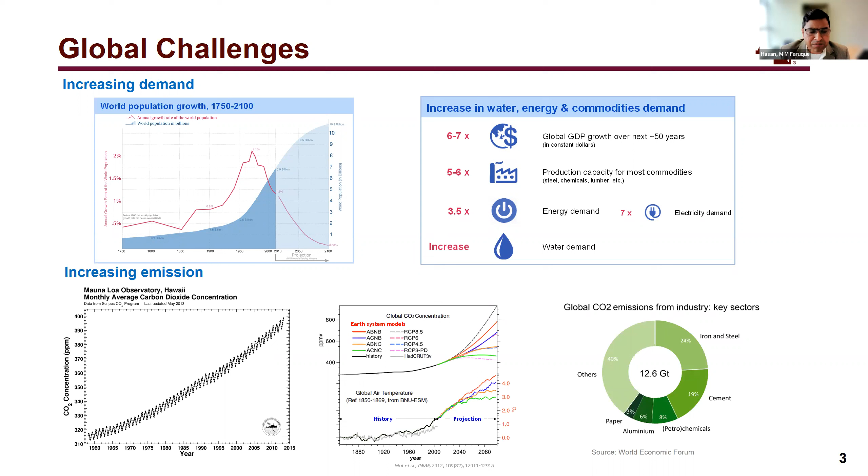Typically, over the last century or so, we have been depending on fossil fuels primarily to meet those demands for energy and associated chemicals. So now there is a challenge too, because when we use conventional fossil fuels like coal, natural gas, or oil, there is an issue of emission, and as we all know, the anthropogenic CO2 emission is a concern. There is now a consensus through scientific studies and research that there is a relation between the global CO2 concentration in the atmosphere and global warming. This is a concern, and a challenge which is global.

So to address this challenge, when we want to meet the demand for humankind, at the same time we want to meet the demand in a sustainable way, new challenges come in terms of how we develop new technologies, how can we make them more sustainable, and so on. How can we produce chemicals and plastics and polymers and many other chemicals in a more sustainable way.

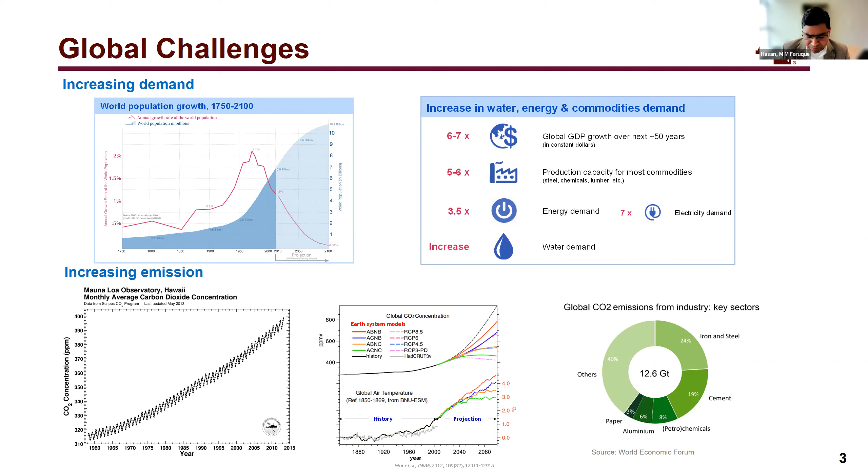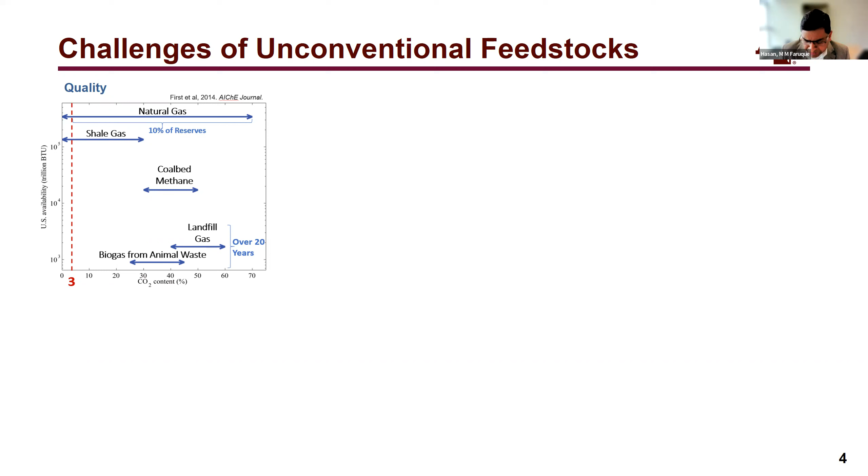So we have, as a global community, also looked into unconventional feedstocks. For example, cleaner natural gas, which is a cleaner fossil fuel. There is other revolution in terms of, for example, shale gas, particularly in the US in recent times. There are other resources which are more unconventional at a different scale. If we want to bring them for use in the energy and chemical sector, one of the challenges is that the separation cost for these unconventional feedstocks is significantly high. For example, many of these unconventional feedstocks have CO2 as impurity, and to remove CO2, the cost is high.

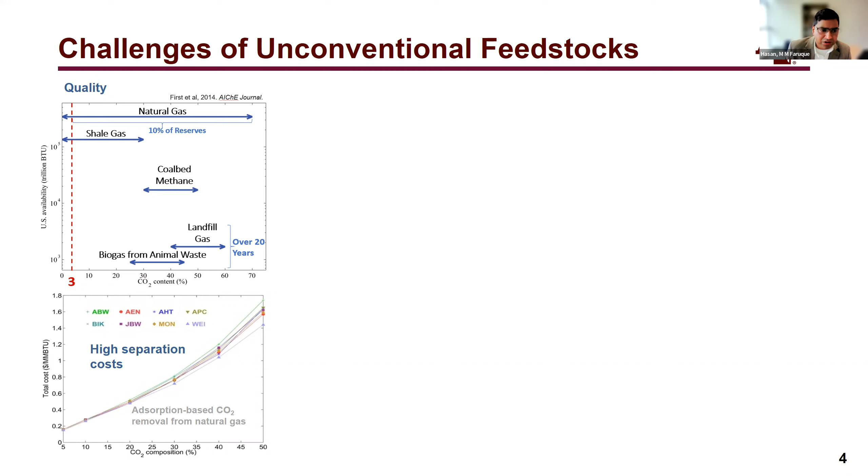That's a challenge. Typically, we do not use these kinds of unconventional feedstocks at a larger scale because of high cost and issues around them. What we typically do is consider them as associated gas and burn them, and as you can see, that creates a secondary environmental problem, which is we again produce more CO2 and put it in the atmosphere.

There is another challenge apart from the cost for these unconventional feedstocks, which is many of these are distributed over geographic locations. They are sparsely distributed and very small scale. Unlike centralized processing facilities, chemical and petrochemical complexes that use crude oil or energy resources in bulk, these energy resources are going to be at a small scale, and we need to decentralize our entire chemical enterprise. So that brings us to the next challenge of how we can do that.

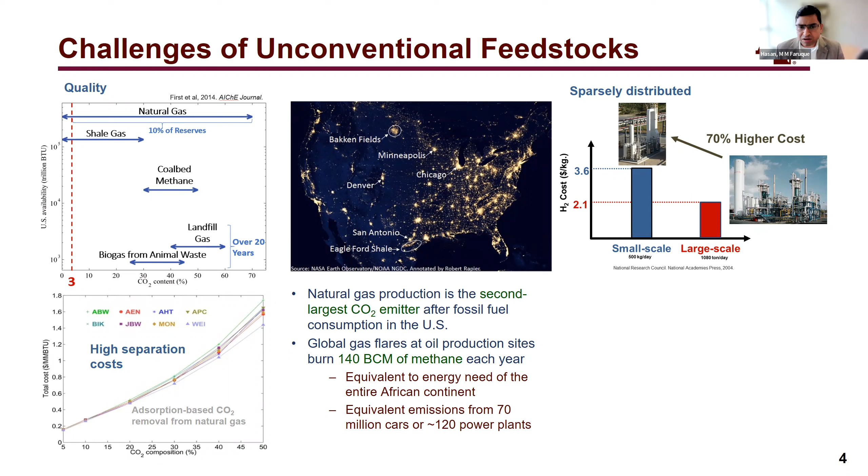When we think about small-scale manufacturing or distributed manufacturing, the key issue there is high cost. I'm giving an example here in terms of producing hydrogen. If we move from large-scale manufacturing of hydrogen to smaller scale, the cost can go up as high as 70%. That makes many of these small-scale distributed manufacturing processes not competitive at the moment with their large-scale counterparts. So that's another challenge we need to think about: how can we reduce the intensity of capital investment for this kind of manufacturing per unit production.

On top of this, we have to also address other challenges in terms of variability of these resources. These resources sometimes change over a day, or in terms of composition, in terms of their availability. For example, here I'm giving an example from landfill-based methane. If you look into the amount of methane that we typically get from a landfill, it is variable over time. As the landfill is developed, we get more methane, but once this landfill is fully developed, the amount of methane we can get from it over the years would again decrease.

So the question here is: how can we design a chemical process that will actually be able to use this kind of unconventional feedstock from landfill, from biogas, from coal bed methane, or small-scale shale and natural gas oil reservoirs? These challenges really highlight the fact that we might need new process design and intensification methodologies.

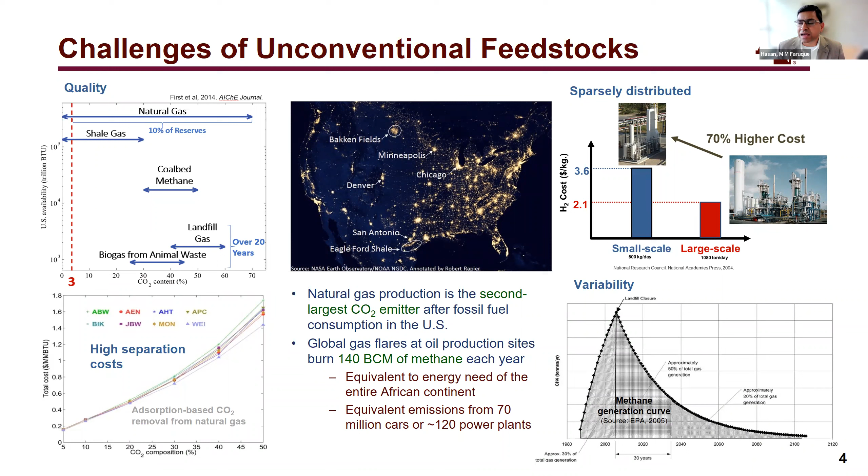So the key question, or underlying question, that we address in our group is this: given a set of feedstocks and a set of targeted products with their specifications, what would be the best, or most suitable, process configuration?

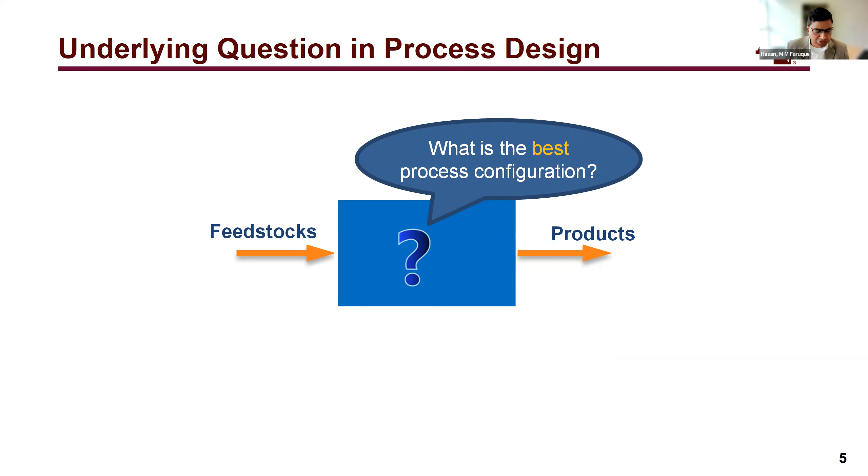Now, this depends on many targets, many objectives. For example, the design of a chemical process would be different if we change our objective from minimizing the cost to, let's say, minimizing CO2 emissions. So having those targets and design objectives in mind, we want a general framework that can be applied to design more sustainable chemical process enterprises.

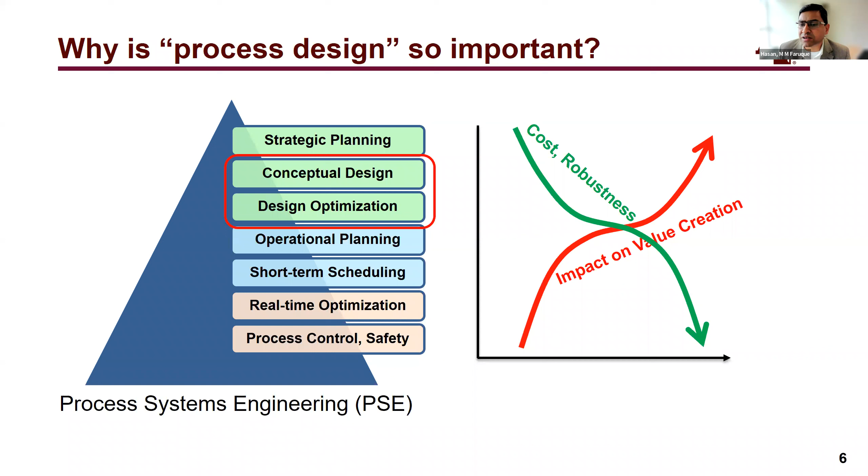Now, if you look into these activities and try to see the impact on value creation, we see the value of design. The effort we put into good design versus the value we create has a high ratio. As we go down from top to bottom, cost increases, but the incremental impact is not as significant. So at the design level, we have the highest impact on value creation. The decisions we make at the design level are critical because we cannot change them for many years once the plant is established, but they don't take that significant cost.

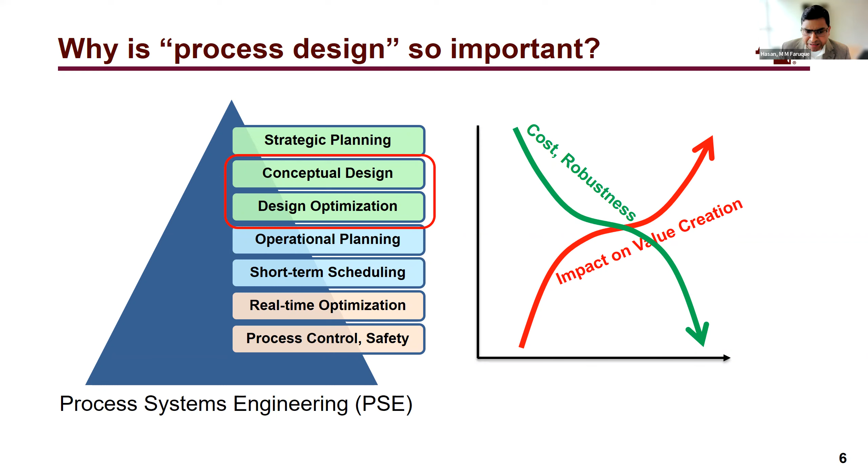That's why design is important, because most of the decision making and their impact goes in at that phase. If you look into different pillars or activities in process design, first, one very important activity is conceptual design. I'm giving a toy example here, where we consider different reactors, if there are reactions involved, and try to select a suitable reactor or set of reactors and a reaction network.

Of course, we don't have 100% conversion, so we need separation. Many different types of separations can be used, and we try to figure out the most suitable separation technique, setup, or network of separation unit operations. Once we have these, we come up with a configuration, which we call a process flow diagram, or PFD, for a given set of raw materials and products.

That's kind of the norm and standard: we bring in people with expertise in relevant areas, designers, engineers, and brainstorm to come up with a set of conceptual designs, then try to improve upon them, analyze those designs, and find the best one.

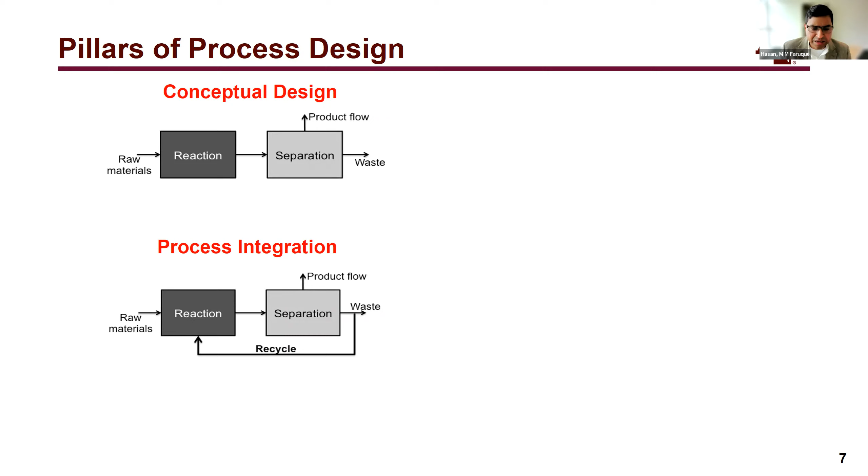But that's not the only thing that can be done. We can also think of process integration, because there will be some waste and some need for resources like energy, utility, water, and so on. So we want more sustainability by recycling and reusing recovered resources, to minimize waste and maximize profitability.

Process integration typically is considered after we have a set of conceptual designs. If you bring all these alternative ways of designing and integrating together, then we try to screen, in a systematic way, the best process configuration. We call that activity process synthesis.

Given the advances made over several decades in mathematical programming and optimization, we are very good as a PSE community at performing process synthesis. For example, if we have a set of reactor alternatives and a set of separation alternatives, we can apply, for example, mixed integer nonlinear programming, or MINLP, to screen the best configuration for a process.

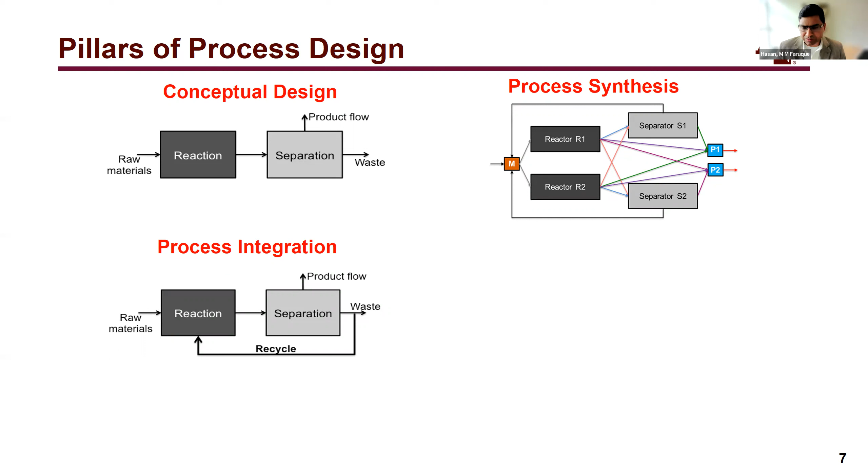Now, the last pillar of process design I want to discuss is process intensification. This is a relatively new concept, but it has been there for some time, in an ad hoc basis in most cases.

I'm giving an example of process intensification: a membrane reactor, where we combine reaction and separation activities together in a multifunctional unit operation, where the membrane separates the product as soon as it's produced using the catalyst. These two phenomena occur simultaneously, and when there's synergy between reaction and separation, we gain significantly higher productivity and less energy consumption.

Many of us know Le Chatelier's principle: if we immediately separate one of the products or byproducts, that moves the thermodynamic equilibrium to enhance productivity. This is one of the concepts used in process intensification to reduce the number of equipment and unit operations, reduce investment and operating cost, and in many cases lead to more sustainable chemical manufacturing.

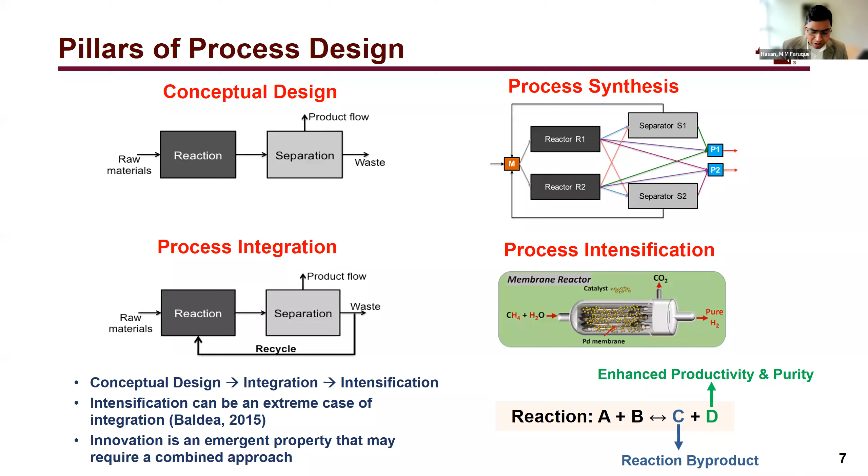One other thing I want to highlight is that along the design activities, we always look for innovative design methods. It's an emergent property when we combine these activities. But one key question is how can we systematize innovation when we do process design? How can we come up with new equipment designs which previously have not been considered?

A bit more on process intensification. There have been many different definitions, but one thing is clear: in process intensification, we look for drastic improvement over incremental improvement. Here's an example of a drastic improvement, a classic case from Eastman Chemical's methyl acetate process, where before intensification, the same process used many different separations in distillation columns and others.

Once we look into the synergistic phenomena in this chemical process, one can think of a single multifunctional equipment that achieves the same performance as a large complex chemical process, with all the activities merged into a single task-integrated column, shown on the right hand side, which not only reduces the number of equipment but also reduces operating costs and capital investment. So there is a win-win situation in process intensification if we do it carefully.

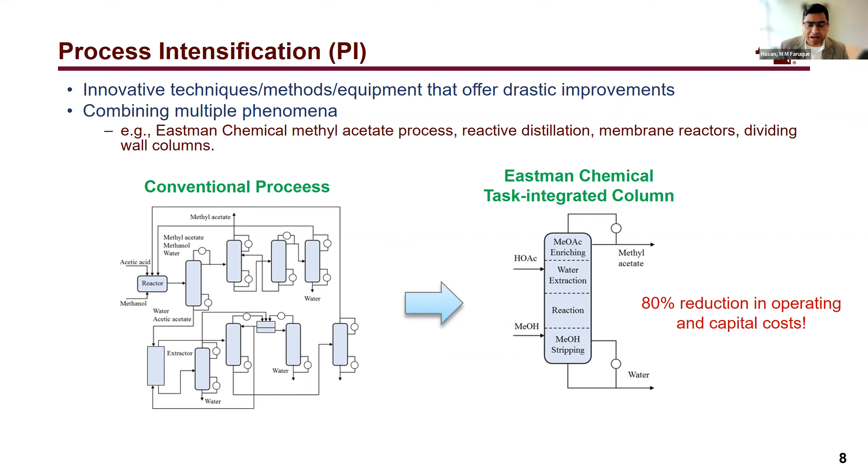But the key question is whether this kind of intensification is always applicable. Can we do it for any kind of chemical process? If not, what will be the design rules and recipes applicable for applying synergistic process intensification?

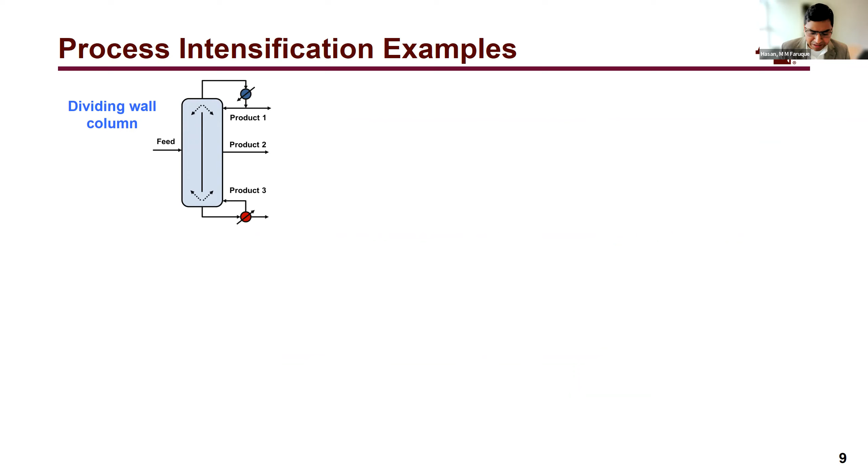There are other examples of intensification. For example, dividing wall column is a great example where we can separate a multi-component mixture of more than two components using a single column, which significantly reduces the investment cost of a separation network. We can also have reaction and distillation together in a reactive distillation setup. That's a form of intensification.

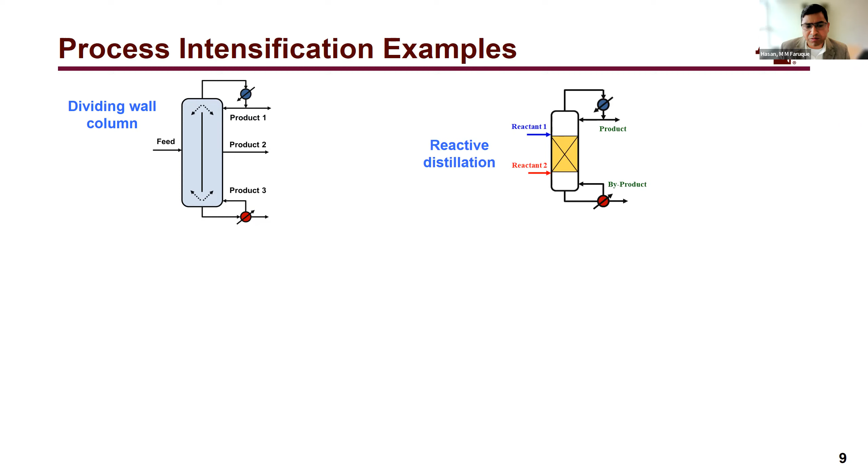As I mentioned earlier, membrane reactor is another example of intensification. Sorption enhanced reaction processes use heterogeneous solid catalyst and solid sorbent. The catalyst converts raw material into a product or set of products, and then the sorbent immediately adsorbs one of the products, pushing the thermodynamic equilibrium for further enhancing productivity.

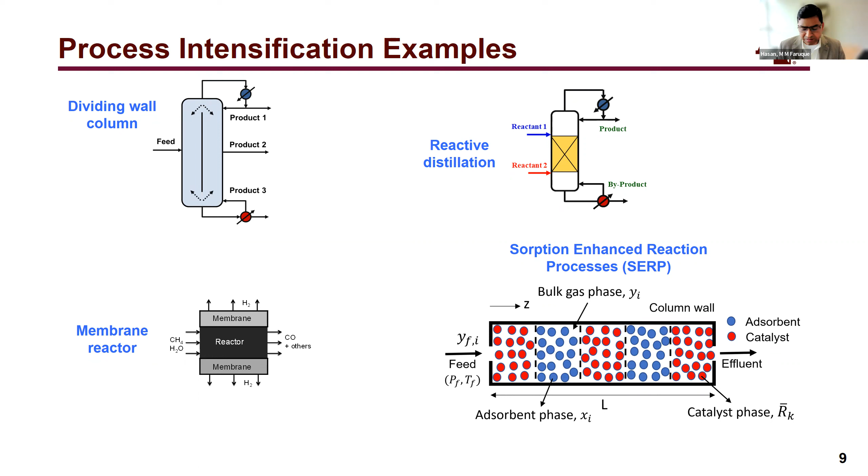So all these are examples of intensification, but given a new design problem, it's not always obvious what type of intensification is the most suitable. That is a key question we address in our group.

Naturally, there has been a lot of interest in process intensification activities. In collaboration with Professor Pistikopoulos' group at Texas A&M, we studied the recent developments a few years ago, and saw significant interest both in developing many different process intensification technologies and in academia. The number of academic papers has increased significantly over the years, and the number of patents, as shown on the right side, across different PI techniques, are also increasing. All this shows there has been significant interest in this area.

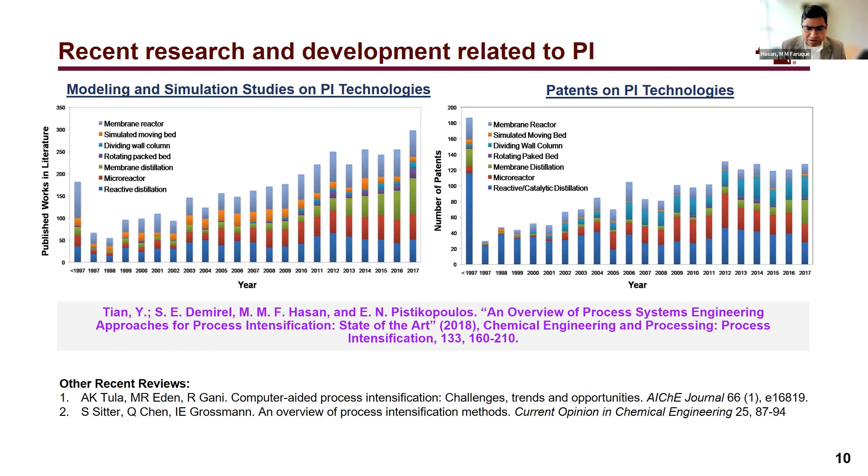There are other recent excellent reviews from Professor Mario Eden, Professor Gani's group, and Professor Grossmann's group, all of which discuss different challenges and opportunities in process intensification.

In our group, we try to address a couple of questions. In the synthesis part, we ask how we can systematically discover new intensified processes without spending significant time and effort, without doing exhaustive screening. In terms of identification, we look into how we can systematically identify pathways that would naturally lead to intensified design. So while process synthesis addresses a greenfield type of design, or a new design, identification addresses the process intensification questions for existing designs.

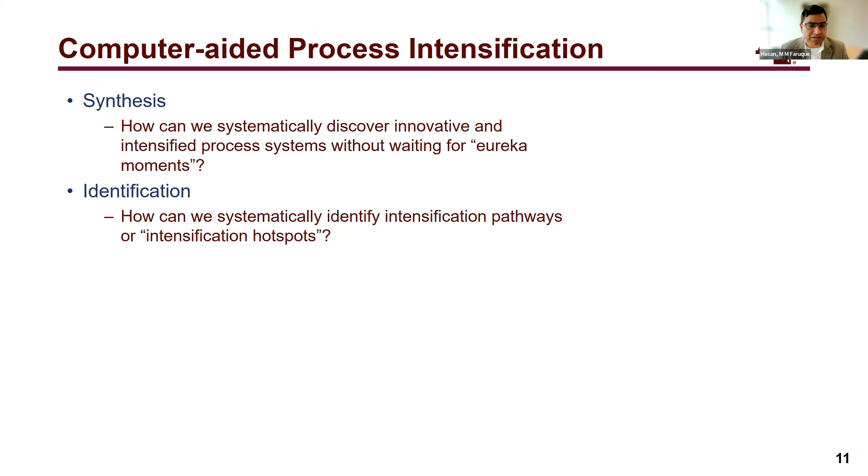So if you're given an existing process flow diagram and you want to improve it without making minimal or too many changes, or under budget constraints, how can we improve a process in terms of sustainability or economics? That's the question we address in the identification part.

And of course, there is analysis. For example, we look into theoretical questions of under which conditions intensification is desirable. If I have time, I'll discuss how it's not always desirable to have intensification—in many cases, it may not lead to improved processes. So the question is, can we classify those kinds of designs versus synergistic designs?

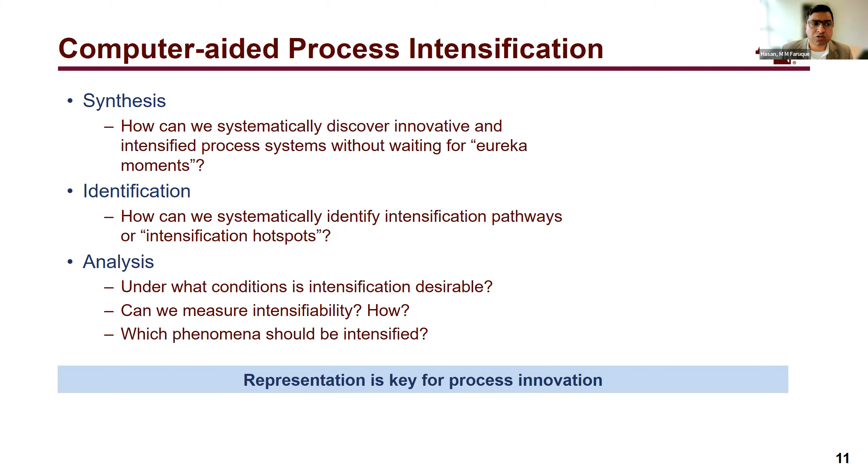All these activities depend on a fundamental question: can we have a representation of chemical processes that will allow us to do systematic synthesis, identification, and analysis? There have been many different representation techniques, as we all know.

For example, superstructure-based process synthesis and intensification use superstructures that bring together all possible ways of combining and configuring unit operations in a single large process flow diagram. But the challenge is that when we think about intensification, many times we will miss novel intensification just because we did not think of that unit operation and consider it in our superstructure.

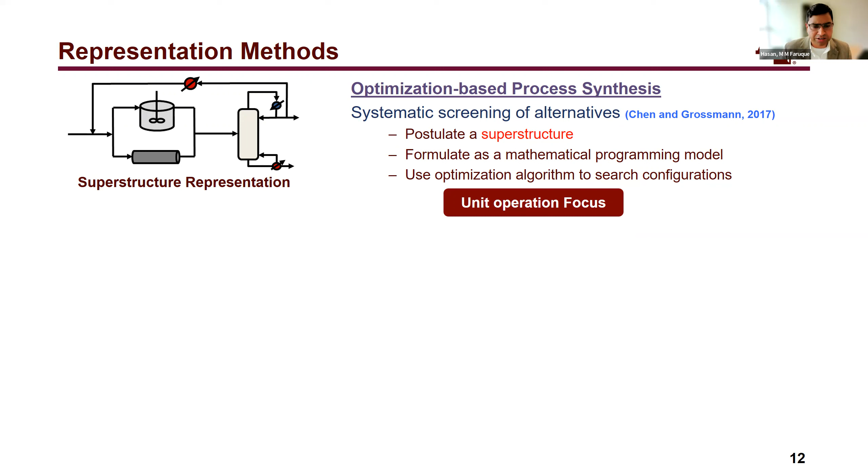So what we need is to move from unit operation based representation towards a more phenomena or function-based representation. Recent work from many different groups has shown the benefits of this bottom-up approach of phenomena-based representation, which makes computer-aided process intensification more suitable for this kind of activity.

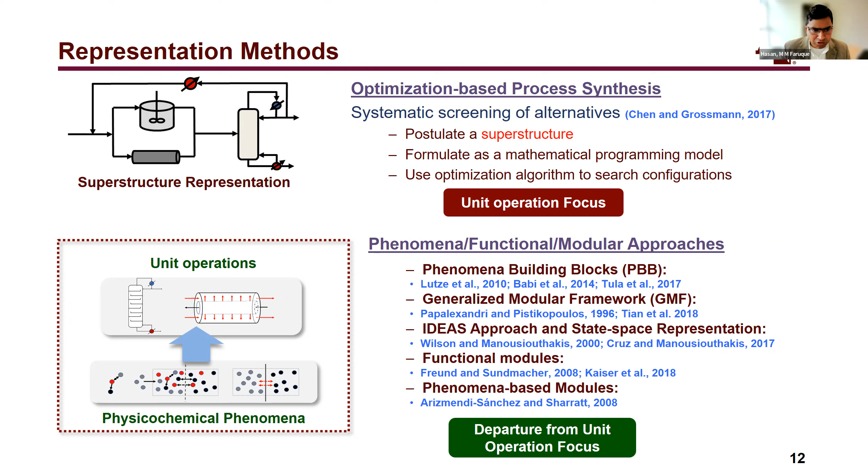So in our group, we have proposed this representation using building blocks. Let me take a couple of minutes to describe what I mean by this building block-based approach.

Let's consider an abstract block here. If I consider flow to the block and from the block, then we can perform mass balance and energy balance for this block. So this building block is kind of an abstract representation of some volume in a reactor, a separator, or any general unit operation.

If I assign a catalyst to this block, then this will become part of a reactor. If I assign a solvent to this block, then it will become part of an absorption column, and so on and so forth. That's how we can consider a general building block and use it to represent many different unit operations.

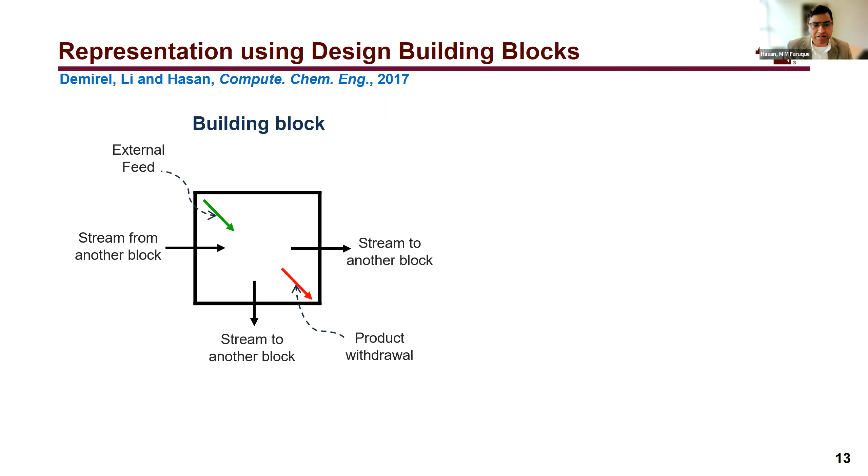We can consider feed coming in or product being withdrawn, which will allow us to create many different mixers and separators through using this kind of building block notion.

We can assign a temperature, a pressure, and a composition. Once we do that, we can model this building block using rigorous thermodynamic approaches of thermodynamic packages. That will tell us what happens when there is a mixture present, what the resultant composition will be, and what the temperature and pressure will be when we mix or separate things.

Now, if we bring a set of building blocks together, it becomes more interesting because then we can represent even more classical unit operations. To do that, we consider not only the interior of the building block but also the boundaries of the building block. We have three different types of boundaries that we typically consider in our building block-based approach.

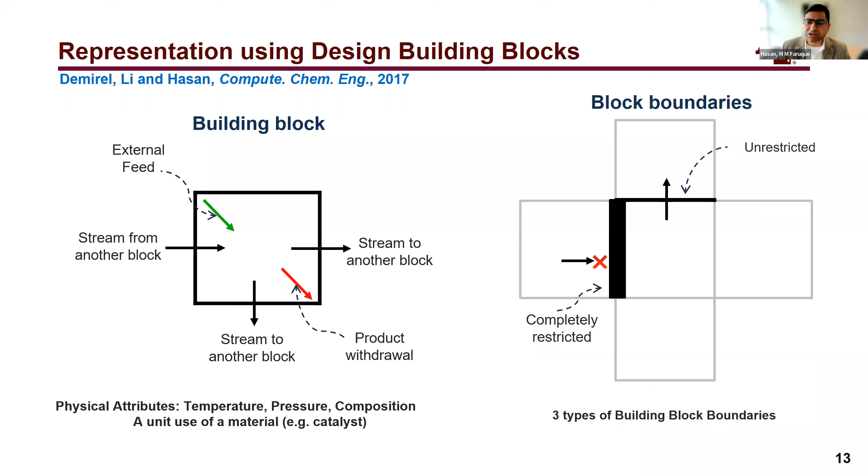But if I have a second type of boundary, which is completely restricted, then it will not allow any mass to flow, let's say from the left block to the center block, but there can still be heat transfer happening. This will allow us to represent many different heat exchangers, for example, when we design a chemical process.

The third type of boundary we consider, we call the semi-restricted boundary, and this is very important for representing chemical separations. For example, if I have a pair of blocks in the center and the right, and I assign a membrane, then I can selectively allow one chemical species over others to flow from the center to the right. So these two blocks together represent a membrane separator.

And if I bring more and more of this pair of membrane separators together, it will represent a membrane module. So these sets of building blocks and the three boundary definitions are actually the key design elements we consider in building block-based representation.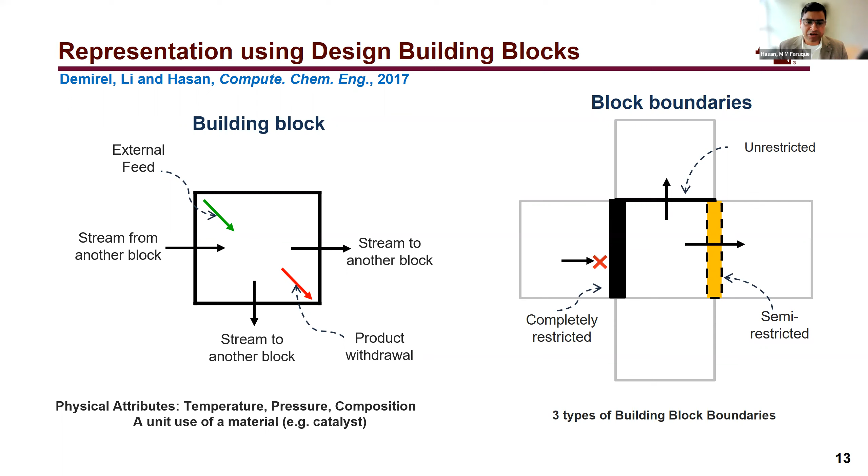I'll give an example. If I assign a catalyst in a single block, that will represent a CSTR. But if I bring a set of building blocks with the same catalyst, then it will represent a plug flow reactor. And we have seen that as we increase the number of building blocks, this representation actually matches the performance of an actual plug flow reactor.

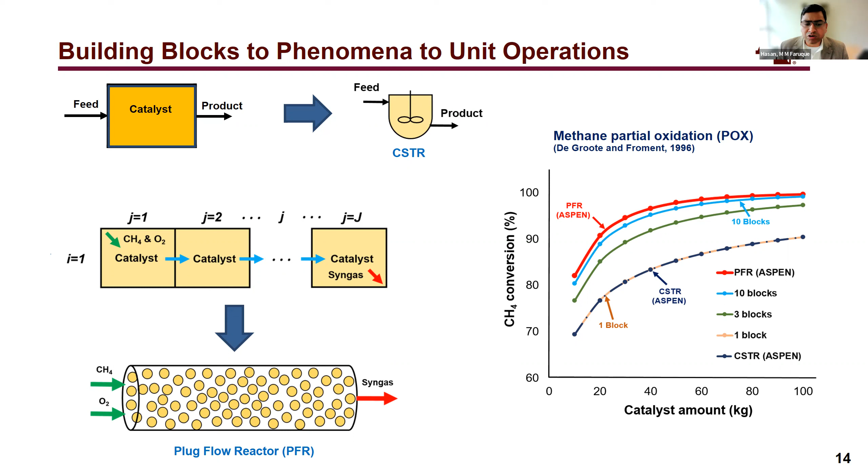We have in silico validated that approach. So that gives us confidence that, yes, building block based representation can be applied to represent many different unit operations and many different classes of reactors.

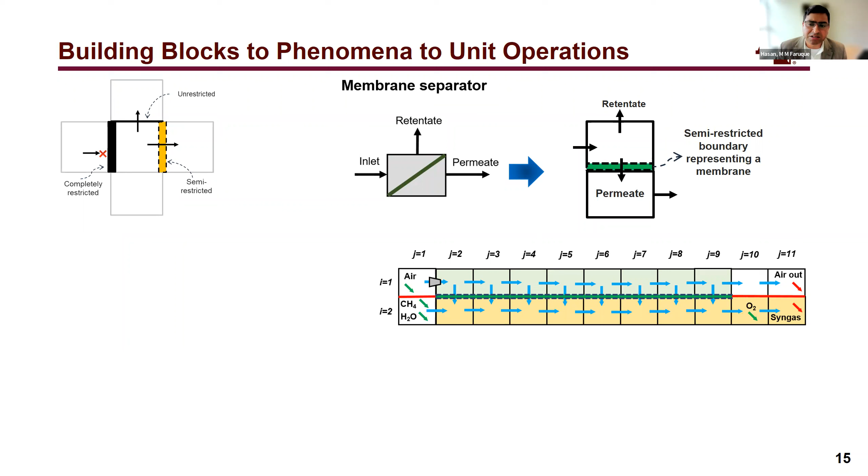In terms of separators, as I mentioned earlier, a pair of two building blocks with a common boundary, which is a semi-restricted boundary with a membrane material, will represent a membrane separator. But if I bring this pair again and again in a sequential form, that will represent a large membrane module. So to represent a membrane module, we do not need a new unit operation. This setup, the collection of the same building blocks and assignment of the boundaries, will do the job.

And we have applied this technique again even for intensified membrane reactor representation. So if one of the sides, let's say the permeate or the retentate side, has a catalyst block, then this whole setup becomes a membrane reactor.

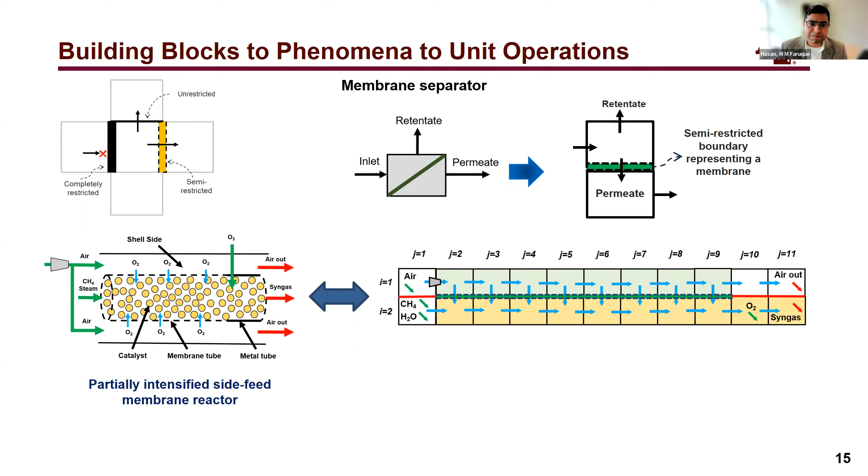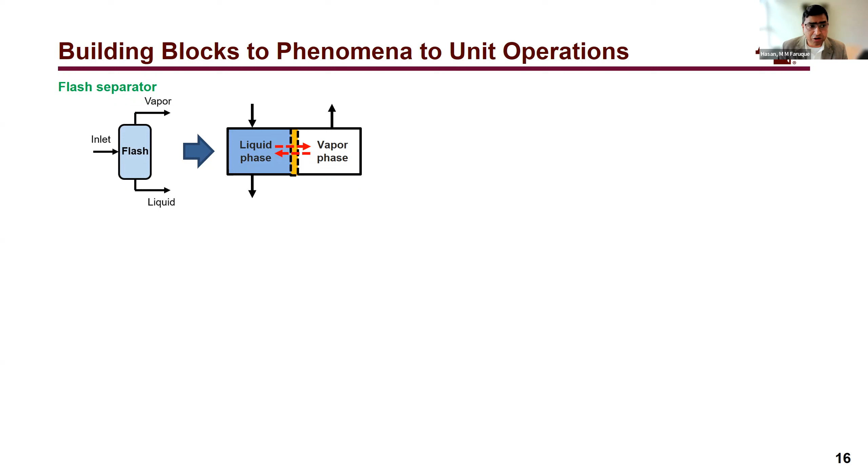In terms of vapor-liquid equilibrium, we can represent a flash separator using two blocks with a semi-restricted boundary in between, which represents the vapor-liquid equilibrium phenomena. If we bring them all together, then this becomes a distillation column with many different building blocks. One type of block would be the liquid phase, another will represent the vapor phase, and at the interface we apply the thermodynamic equilibrium.

So that kind of leads to even more complex or complicated configurations. We can use this building block representation to even represent the Eastman chemical task integrated column that I showed earlier. And we have also validated this approach, that the building block-based approach, if we use many different sets, approaches the same performance as a rigorous reactive distillation column.

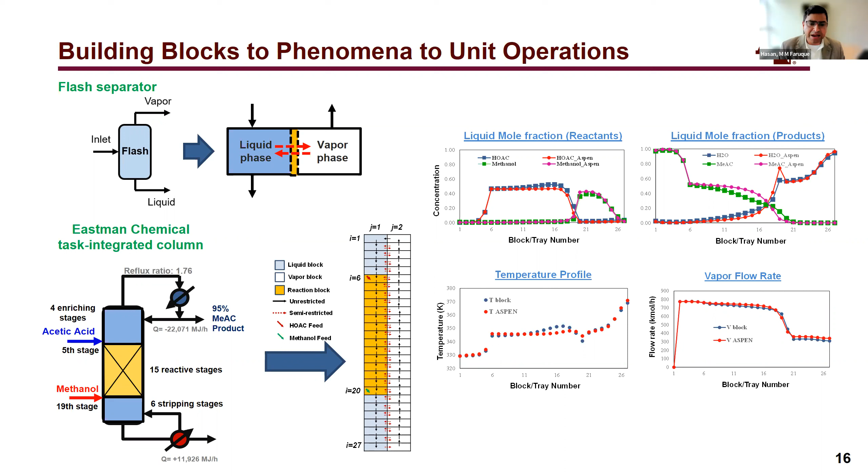So the point here is that we can use the same notion of building blocks and boundaries to then reorganize them to create many different unit operations in the same framework.

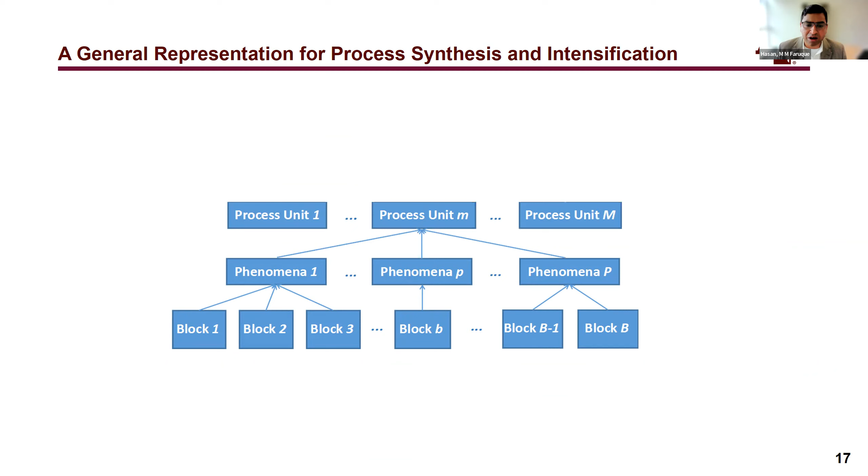So to summarize, let's consider a set of building blocks. If we bring them together, they can represent many different phenomena, and many different phenomena can then represent many different unit operations, process units, and a collection of process units becomes a process flow sheet, and many different alternative process flow sheets will give us a superstructure.

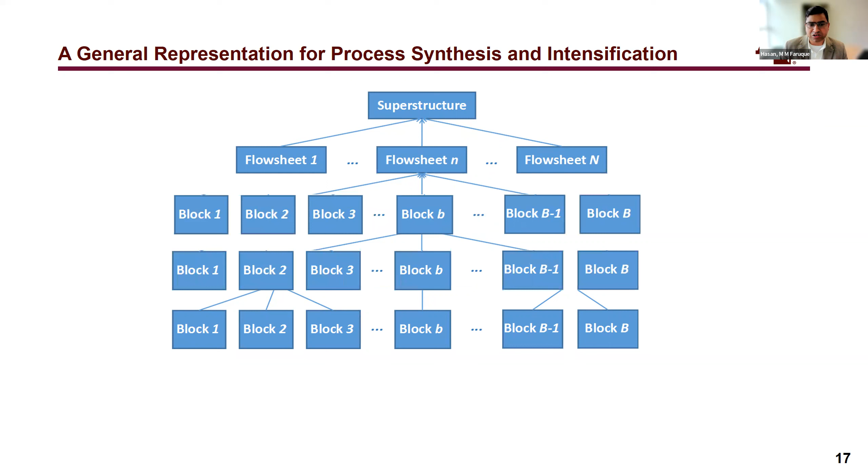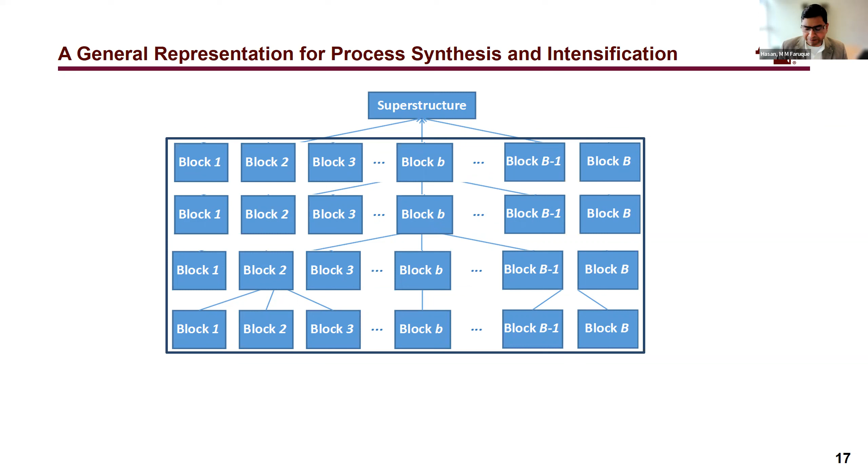So that way, we now have a single representation of a superstructure just in terms of building blocks and boundaries. This tells us that, yes, there is a possibility of a generalized representation of process superstructures, rather than spending significant time and effort on problem-specific superstructures. We can have a common superstructure for all design problems.

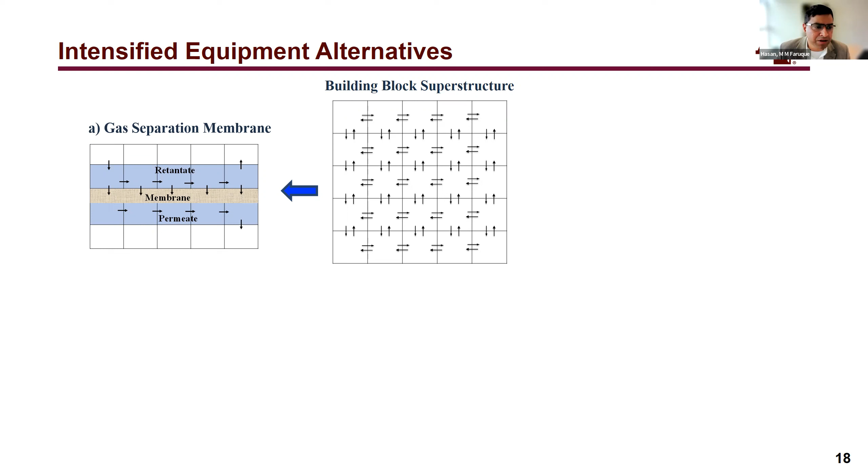And the way it would work is that we have a superstructure representation. You select a subset that represents a unit operation, for example a membrane separator or a membrane reactor or a dividing wall column distillation or even a task integrated column. So all these unit operations are kind of embedded in the same superstructure.

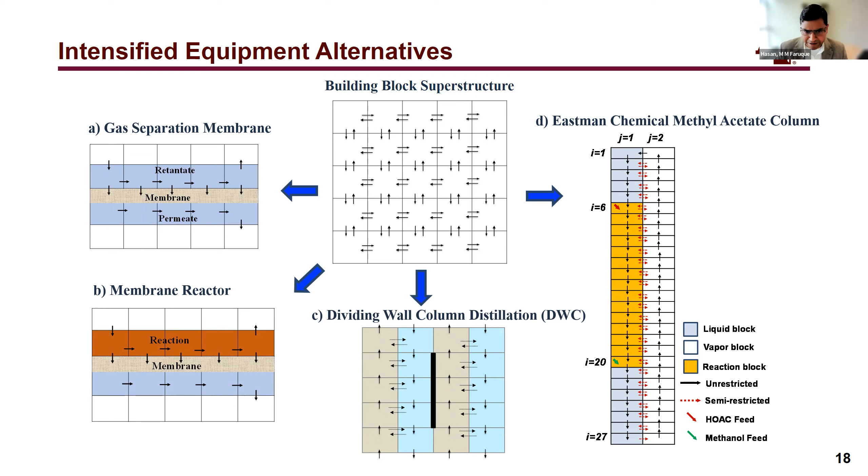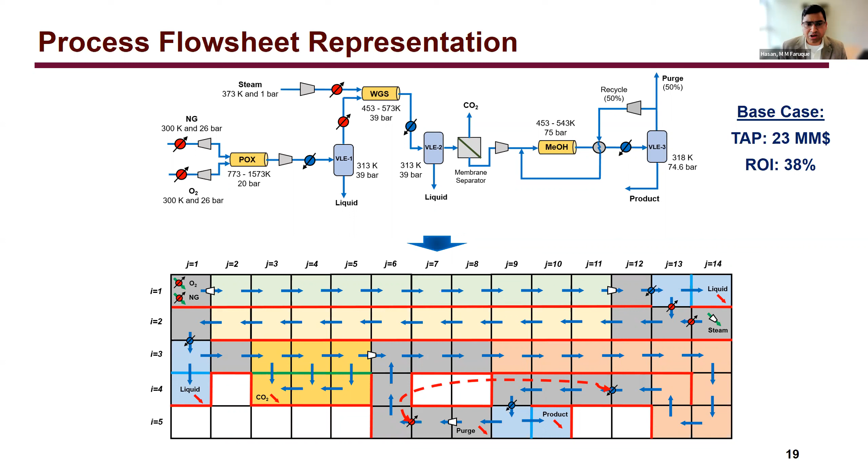Even we can expand that to an entire large-scale process flow sheet. Here I'm showing a classical representation of a chemical process flow sheet on top, and the equivalent building block-based representation on the bottom. So once we have this building block-based representation, we can then perform process synthesis on it, which is much easier using mixed integer linear or nonlinear programming type formulations, and we can optimize over that.

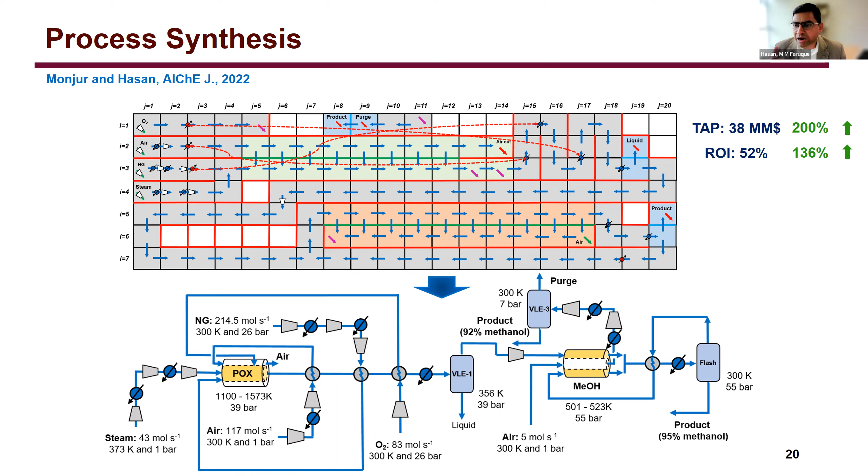And then we come up with a new organization or rearrangement of this building block, which represents a better process flow sheet. And we can then convert that building block representation to the classical representation, which then has better annual profit or better return on investment.

So we have done this exercise and combined all of them together in a general framework, which we call SPICE. SPICE stands for Synthesis and Process Intensification of Chemical Enterprises. SPICE includes this building block representation that I mentioned. It includes thermodynamic property models. It includes all these mass and energy conservation laws and phenomena models, so that we can now perform process design activities for many different problems.

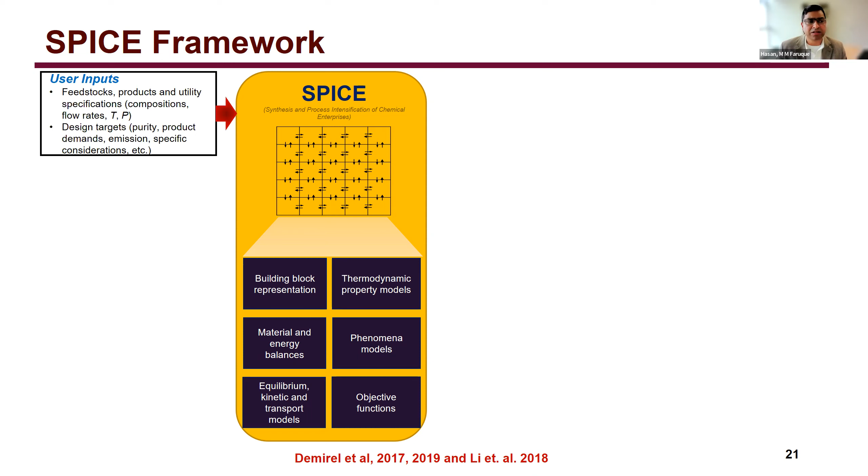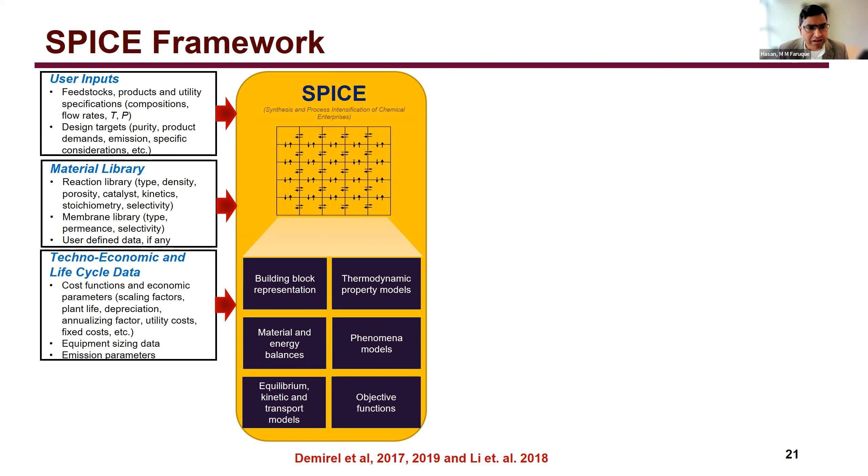So the user can come up with a different set of feedstock specifications, product specifications, and design targets. They can also pick different materials like catalysts, separators, solvents, or membranes that they want to test. They can also select different levels of goals in terms of techno-economic and life cycle analysis, and they can even bring their own phenomena or unit operation models, which we can then include in SPICE, and SPICE will then tell, okay, for a given design problem, whether it is more useful to intensify or not.

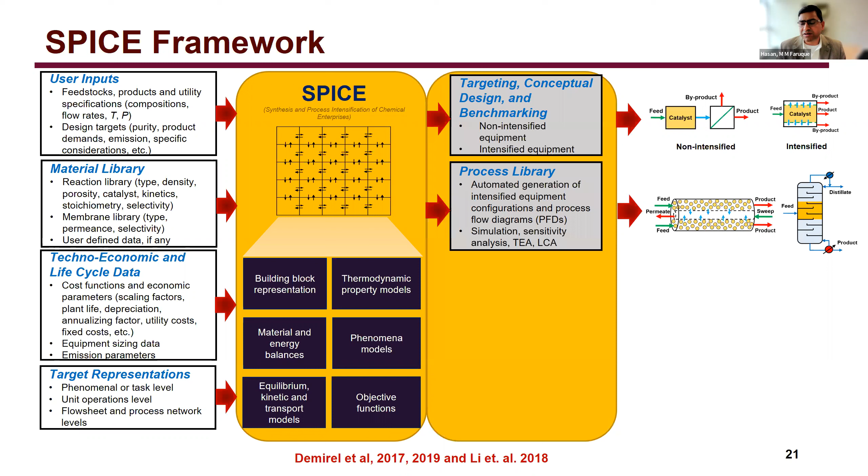It can also give us different designs of intensified process unit operations with their cost, energy consumption, and emission specifications. SPICE can create new process flow sheets and screen over different process flow sheets. It can also connect different material properties with process performance to provide a map of process performance versus material properties, to guide experimental synthesis of different materials.

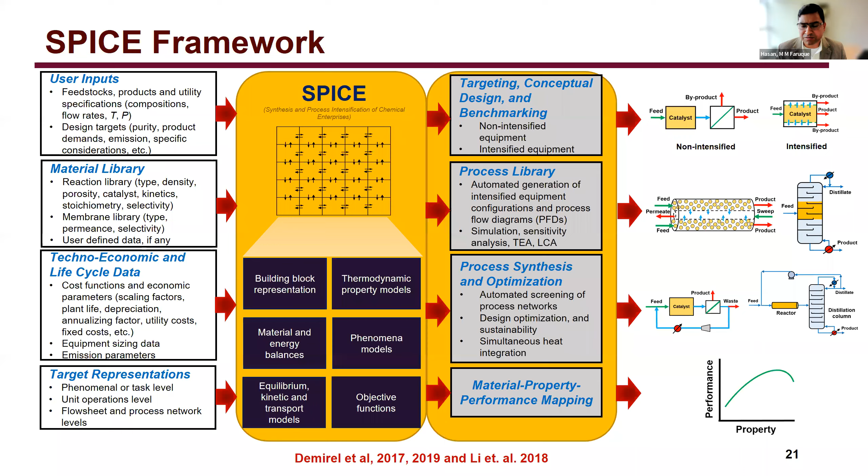This is a busy slide. I'm just going to skip this for the sake of time.

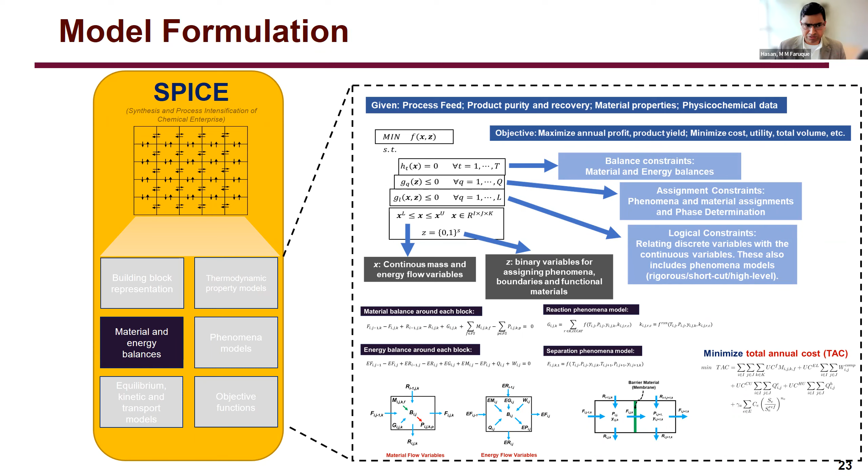But the idea here is that we have a general mixed MINLP formulation representing mass and energy conservation laws and different process configurations and constraints, and also different phenomena models that are embedded together in the MINLP model of SPICE, which we then solve using commercial solvers like Antigone or Baron to find global optimal solutions on these design problems. So quickly, let me show some example problems we've worked on.

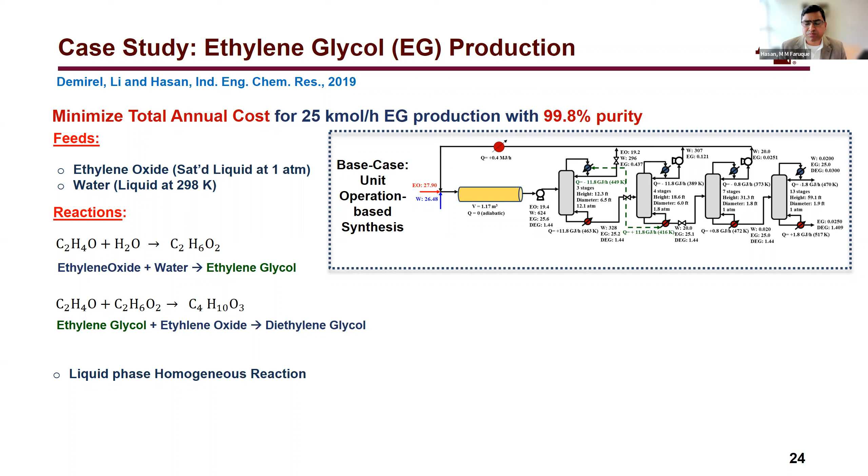Then SPICE generates different process flow sheets. For example, one is shown here, where if the user doesn't want intensification, SPICE will generate this non-intensified process flow sheet with all these specifications. So it's a systematic way of generating process flow sheets without spending significant time.

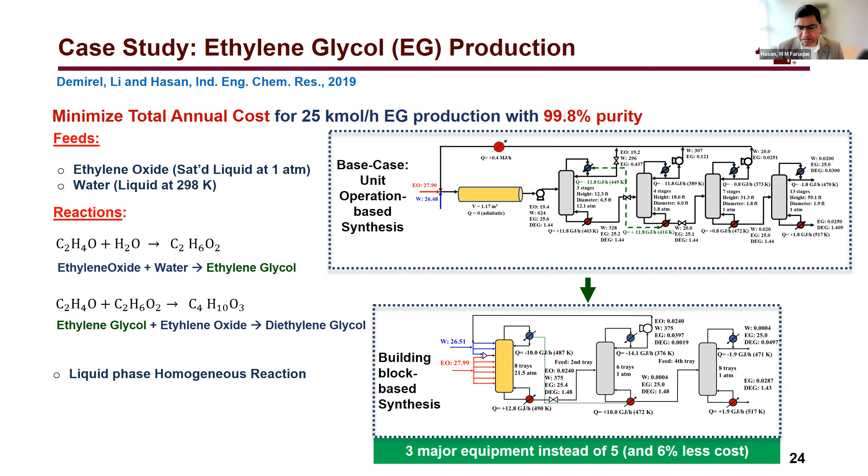If the user wants an intensified process flow sheet, SPICE can generate that too. For this particular example, process intensification is actually a better approach, where we have designs with fewer pieces of equipment and lower investment cost. So that's one example.

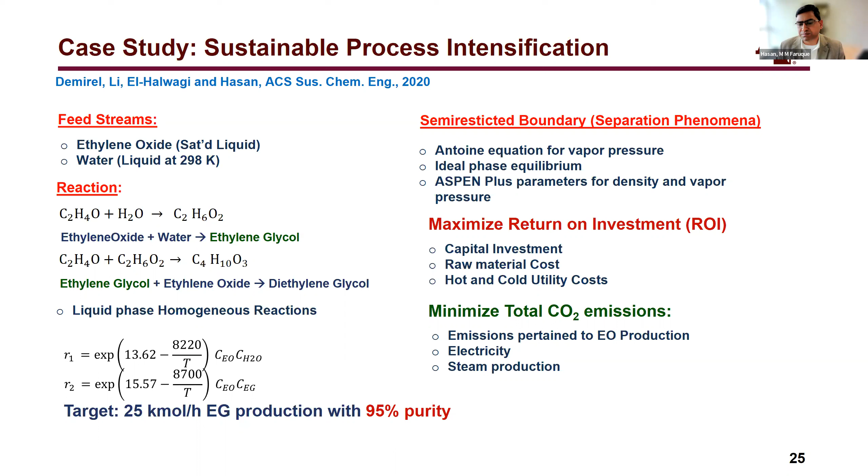Another example: if the user wants to consider multiple objectives, one being maximizing return on investment versus minimizing total CO2 emissions for sustainable design, SPICE can generate a set of design alternatives and provide the return on investment and emission value for all of them.

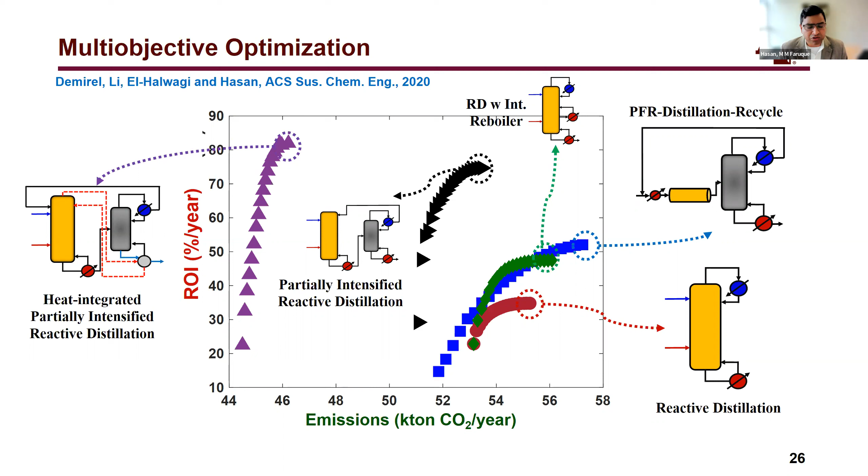And then at the end of the day, it goes back to the user to decide which design they want to actually implement.

So with that, let me quickly summarize what we've been working on in this area. Intensification has a lot of potential for addressing many challenges, including global challenges of how we design new chemical processes that are more sustainable, use less energy, and have less CO2 emissions and other emissions, less waste. We've analyzed different approaches in process systems engineering that can do this, but we think process intensification can help, though we really need a general representation that brings these different pillars of design together in a single general framework.

To do that, we have proposed a building block-based approach, and we believe this is a step forward towards designing new chemical processes for the next generation of chemical manufacturing, which can bring significant benefits to designers. But there exist many different challenges, of course.

For example, we have yet to discover design rules that can be applied just by looking at a problem and saying, okay, intensification may not be applied here because there is no synergy. How do we analyze that kind of synergy in a more mathematical form, in a more systematic way? So that's an outstanding question: how can we systematize innovation without even postulating new design alternatives, and discover those?

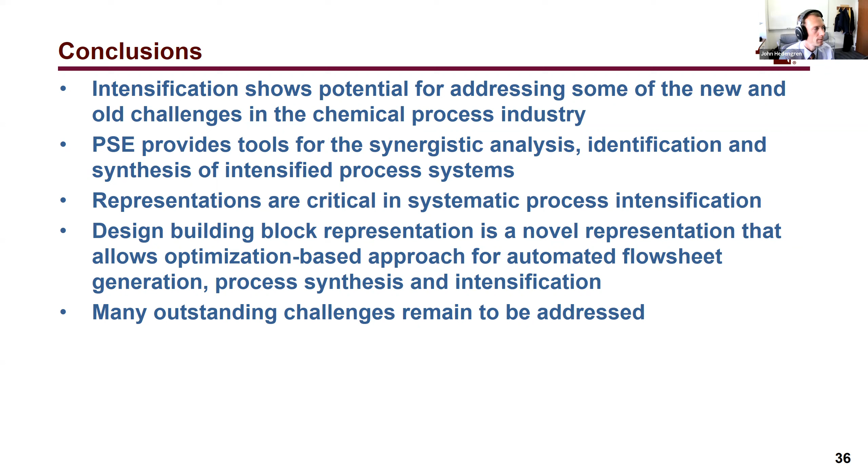Well, thank you so much, Faruque. That was a very motivating presentation and many new ideas that your group is working on. I even noticed you have somewhat flavors of SPICE as well, like the Mars, the membrane-assisted reactive separations, and other parts that are attracting a lot of attention right now because of how they're being used for designing these systems. Well, that's great.